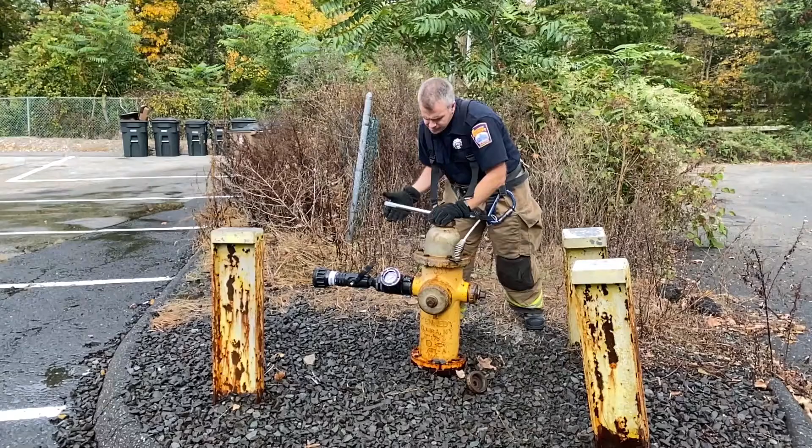Welcome to the 2021 Hydrant Inspection Program for the Stamford Fire Department. For the safety and protection of the residents, our department members, and the operational aspects of our profession, this year we will kick off with a more in-depth inspection for the first round. Every stem will be turned and every hydrant will flow water in a controlled manner.

Our goals and objectives will be: inspect hydrants for several common issues, gather and record this data, a pressure and flow test, and pump the hydrants as necessary. This will allow us to obtain comprehensive data that will be analyzed to perform necessary repairs and create a more reliable fire protection system.

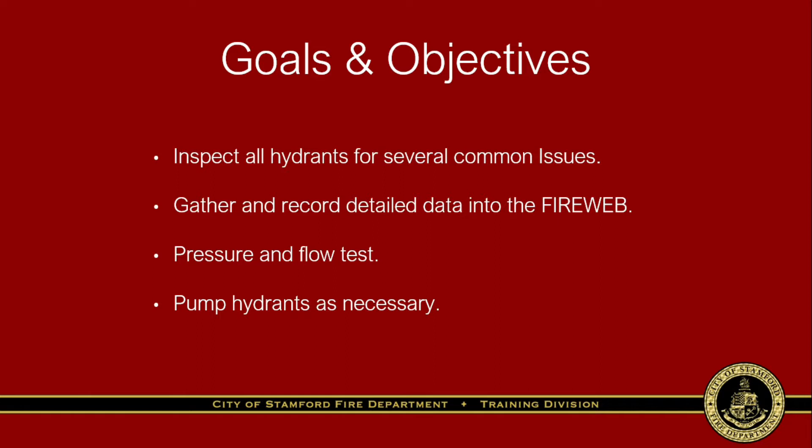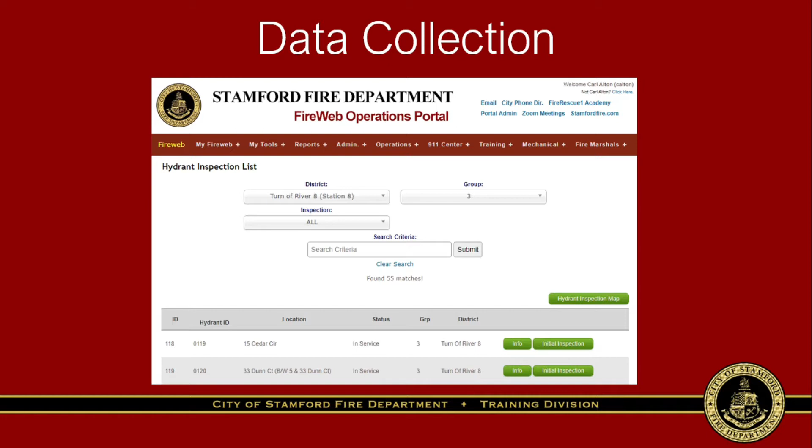The data collection point remains through the FireWeb. This is accessible while you are on your inspection routes. Simply log in, go to the Mechanical tab, and scroll down to Hydrant Inspections. Here, you can narrow your assigned hydrants by station and group. You will see new items and instructions on the inspection form, which will help us identify several issues we can have with hydrants.

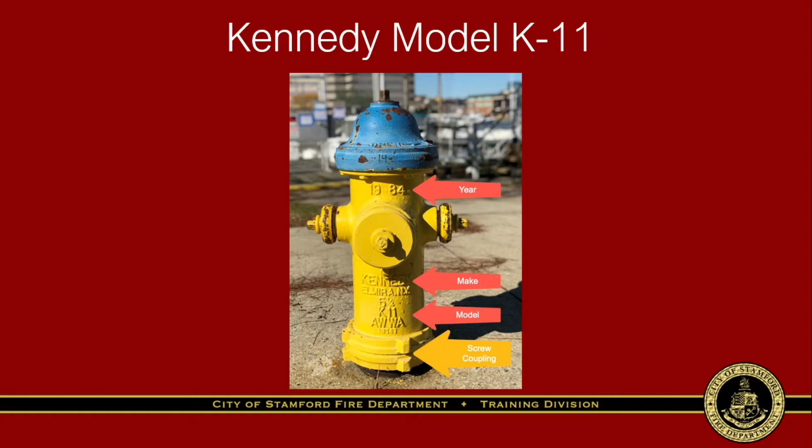Let's first review what type of hydrants we have out there. The Kennedy is one of our most common hydrants and comes in different models. This is a K11 and has a screw-type collar and will have detailed info on the make, model, and year. The newer Kennedy 81A has a breakaway collar that bolts the hydrant to the riser.

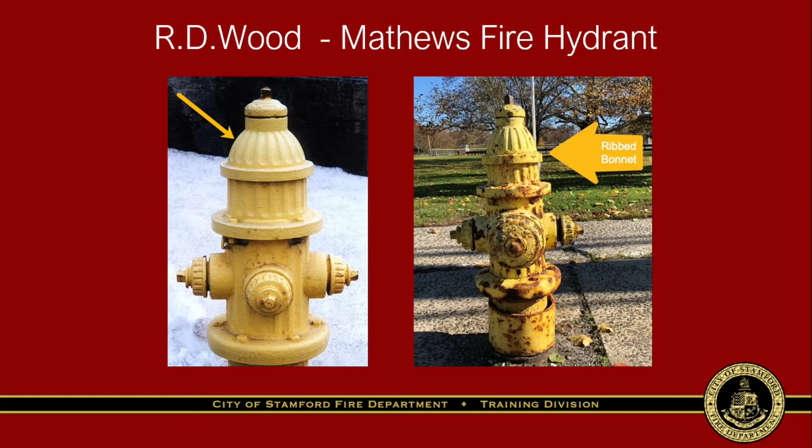We also have RD Wood or Matthews fire hydrants. These are easily identifiable by the ribbed bonnet. These are some of our oldest fire hydrants and info is limited on them. There are a few other hydrants that don't fit the pre-mentioned criteria. Some were also issued adapters to conform with our Stamford hydrant thread size. If there is any doubt on thread size, carefully test fit with your apparatus hydrant adapter and report any issues.

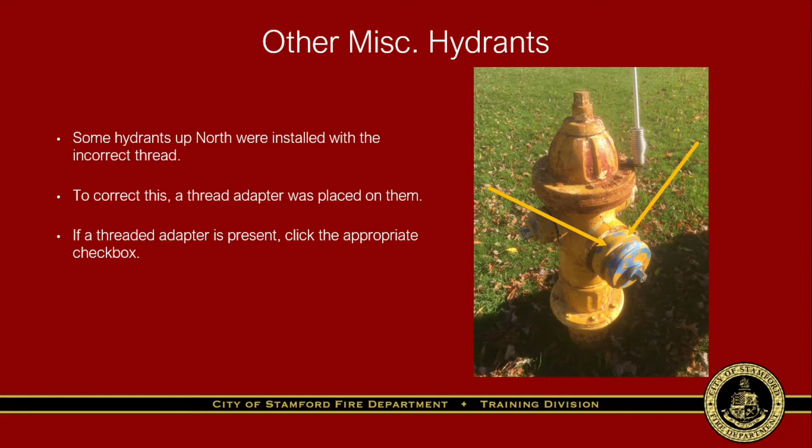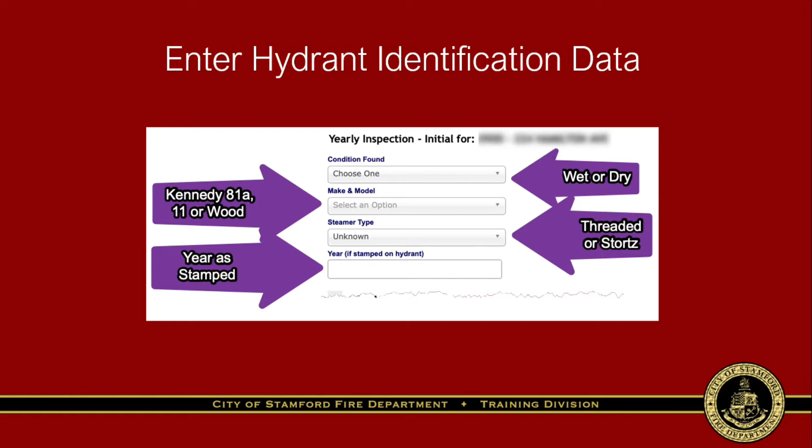To begin the inspection form, enter as much information as you can about the hydrant. The condition found will be defined after we perform a pressure test, which we will cover later. So what are we looking for? Some immediate concerns will be damaged hydrants, unstable hydrants, or collar damage to hydrants.

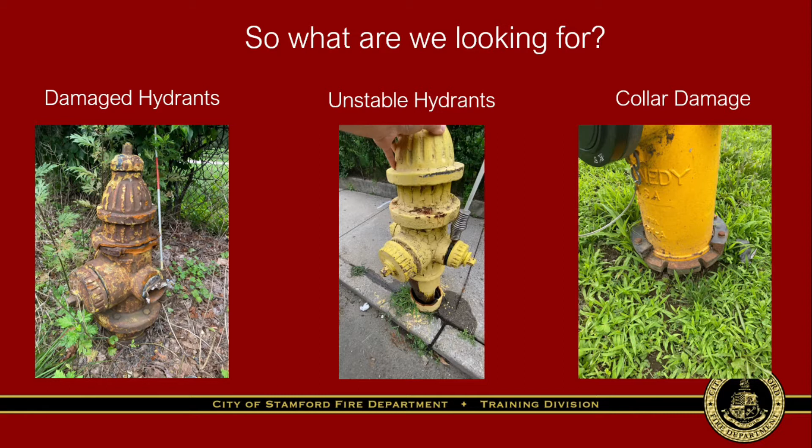These hydrants should not be turned on and immediately reported as out of service and a red ring placed on the hydrant. It is the policy of the Stamford Fire Department and the district unit's responsibility to place a red ring on the hydrant. If red rings are needed, they can be acquired at the mechanical shop.

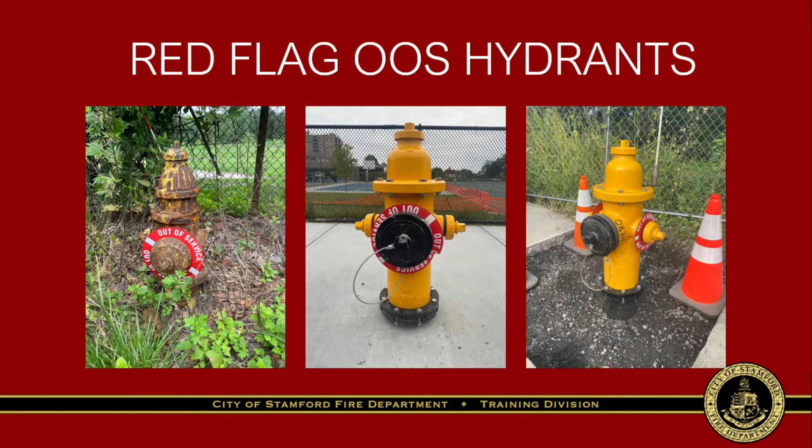Large rings will easily fit behind the large cap of a threaded steamer. For the Storz hydrant, you may need to slice the ring to fit it behind the Storz connection. We also have smaller rings for the 2.5 ears. Use one on each side if you have to go this route. Having more rings visible has already shown to help for everyday out-of-service knowledge or incident-specific emergencies. If you must identify a hydrant as out of service in this manner, please return with a red ring as soon as possible. In the heat of the moment, uniformity helps identify the issue clearly.

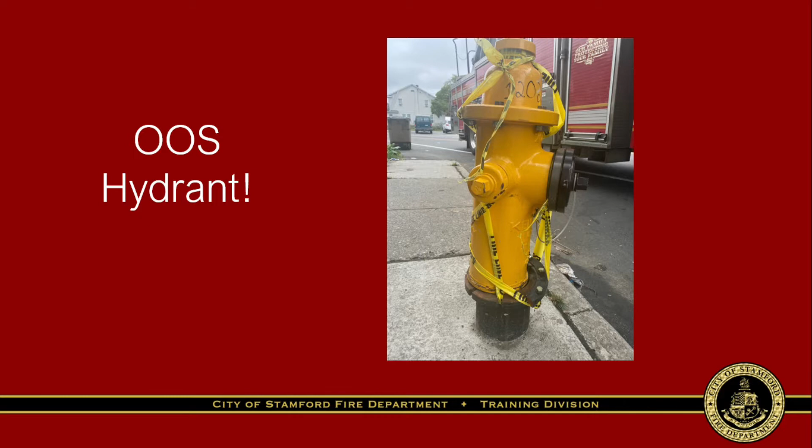To take a hydrant out of service, the officer in charge will change the status of the hydrant in the FireWeb portal by going back to the Mechanical tab to Citywide Hydrants. In the search criteria, enter the hydrant number and click Submit to go specifically to this hydrant. For that hydrant, click Add History. Scroll down the page to the Choose Category menu and choose Out of Service Hydrant Damage. Write in the notes the damaged issue and that the hydrant has been red ringed. Then click Save and return to the inspection platform.

This will generate the appropriate email notifications about the hydrant to the Deputy Chiefs, Fire Supervisor, and our Hydrant Division to begin the repair process. There is no need for phone notification.

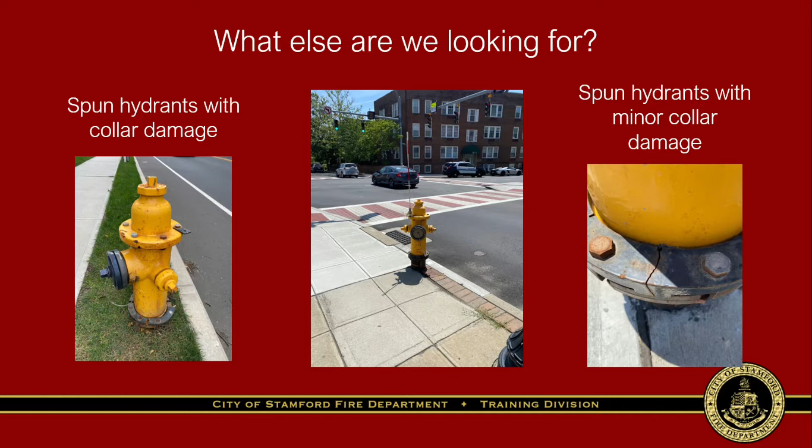Spun hydrants with significant collar damage shall be taken out of service immediately. Spun hydrants with minor damage can remain in service as long as all bolts are in place around the collar. However, a service needed report must be submitted. This process can also be accomplished through the same manner as taking the hydrant out of service. However, this time choose the option of service needed and enter the problem into the notes. Service needed reports can also be made for items such as this broken dust collar.

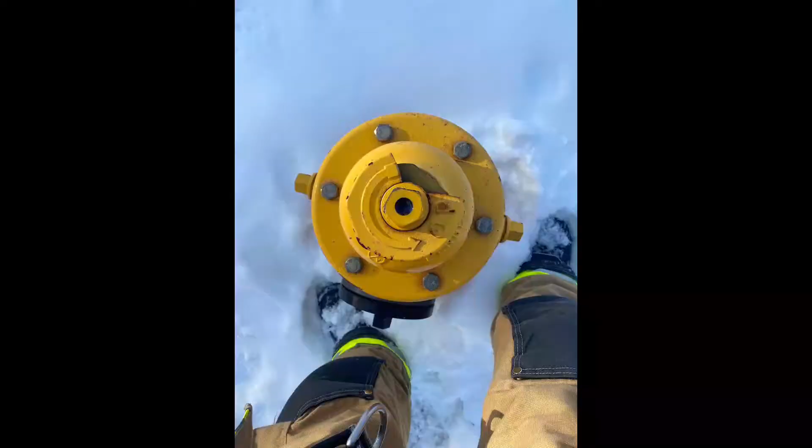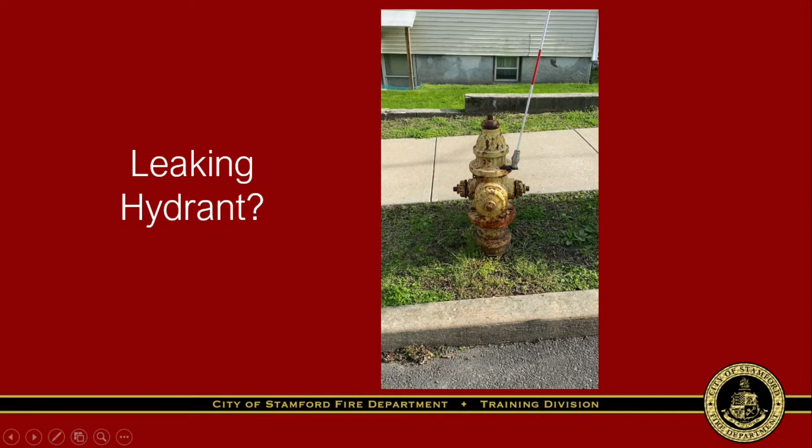Leaking hydrants can be checked first to see if they are completely shut off. If it appears they will not stop leaking, no further inspection is needed. A red ring shall be placed on the hydrant and the officer shall place it out of service in the hydrant app. Aquarion will have to respond out and turn off the hydrant at the street valve key.

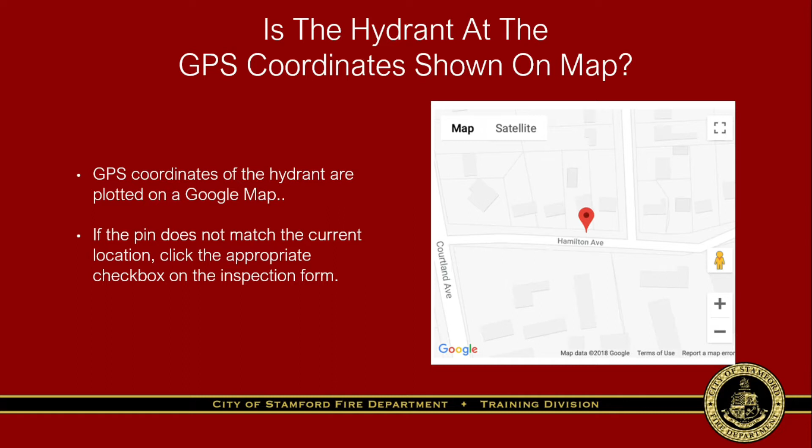GPS coordinates. This helps us all know exactly where the fire hydrant is when responding to incidents. If it appears the pin does not match the location of the hydrant, check the appropriate box on the inspection form. We will go out and update these coordinates so CAD, the MDT, and Tablet Command can show their proper location. Is a gate valve visible? Many have been paved over through the years, and this will help us expedite repairs.

Is there a flag installed? Some companies are equipped with tools to fix or install a new flag. If you are able to install a flag correctly, please do. If not, check the appropriate box.

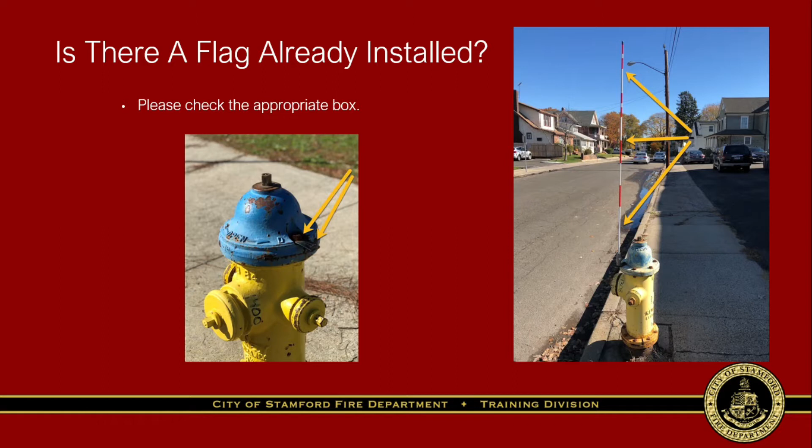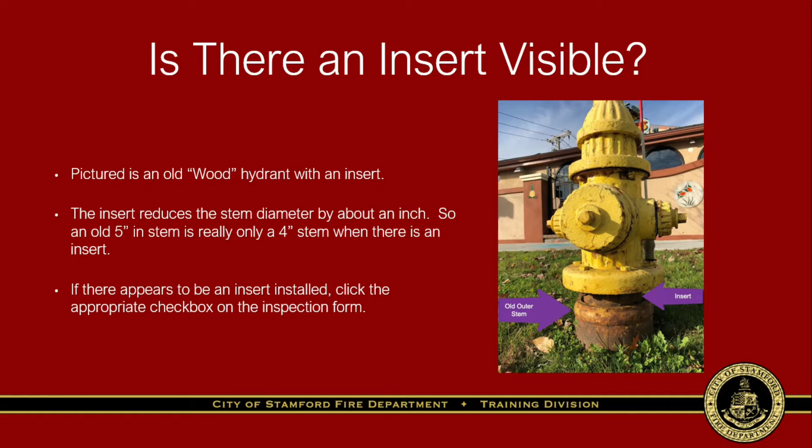In the past, hydrants that were damaged were fixed using inserts. A smaller barrel is inserted into the existing barrel. This results in less water. It is now our policy not to use inserts anymore. However, we would like to know how many Kennedy inserts are out there. A Kennedy insert may or may not clearly look like an insert at the base. However, it is obviously narrower than a standard Kennedy and will be stamped on the back with a 4.5.

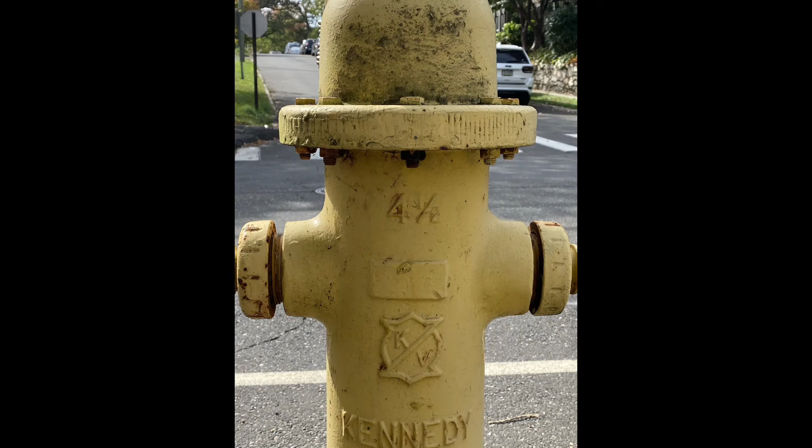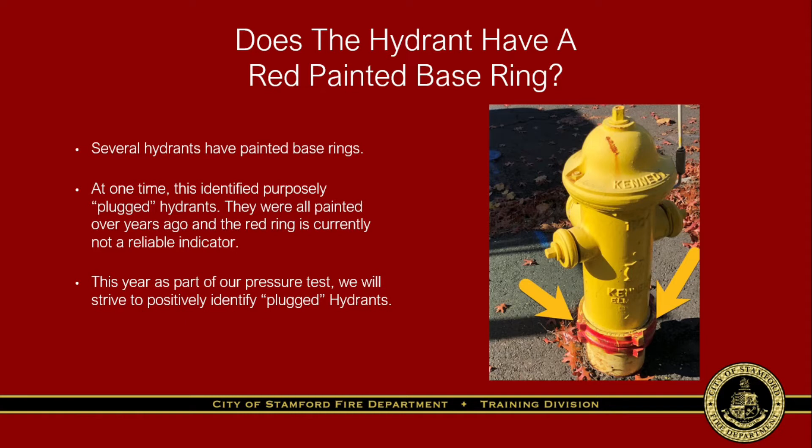Please mark appropriately. Check the base ring to see if the hydrant is or ever was painted red. Some hydrants located in high groundwater areas were purposely plugged and the rings were painted red to indicate that the hydrant must be pumped after each and every use. Unfortunately, over time, this system is no longer accurate because red rings were painted over or repainted red incorrectly. This year we will attempt to positively identify our plugged hydrants during our pressure test and mark them correctly. We will also review how to identify a plugged hydrant versus a wet hydrant shortly.

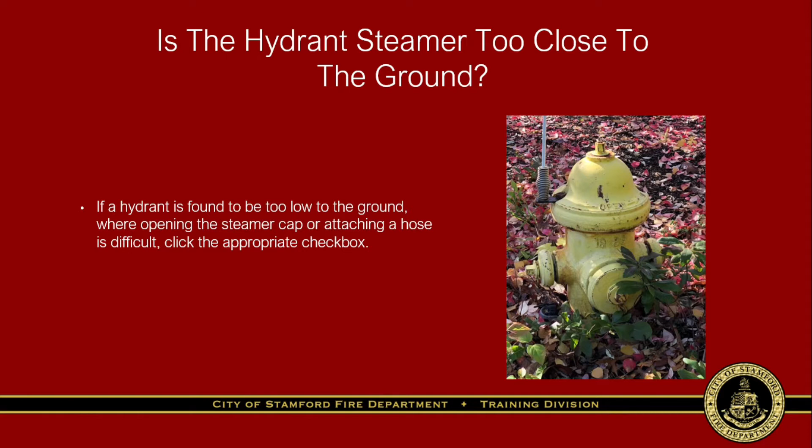If a hydrant is found to be too low to the ground, please check the appropriate box. Our goal is to add extension rings to these hydrants to make them more user-friendly. If you come across hydrants buried in brush or are hard to see from the road, please check the box and also email a picture to sfd.hydrants@stanfordct.gov so we can contact the appropriate party to be sure hydrants are not obstructed.

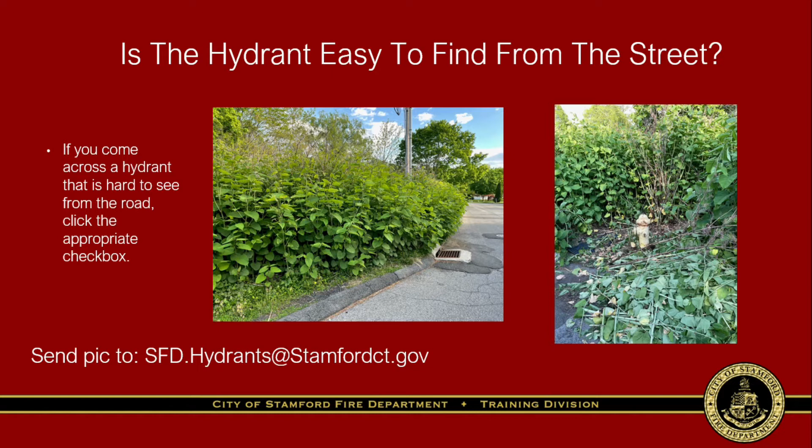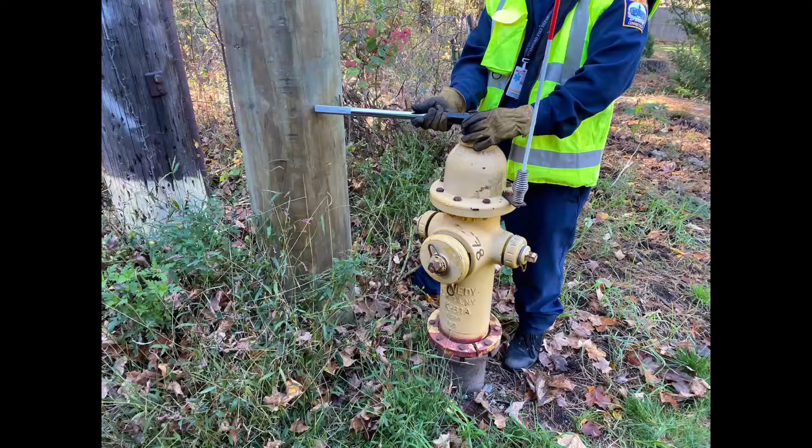Hydrants should have a minimum of a 3-foot radius around all sides of the hydrant and be clear of private property fences, walls, poles, or any other vertical obstructions that could inhibit the use of the hydrant. Please do what you can to continue the inspection and we will take the appropriate action.

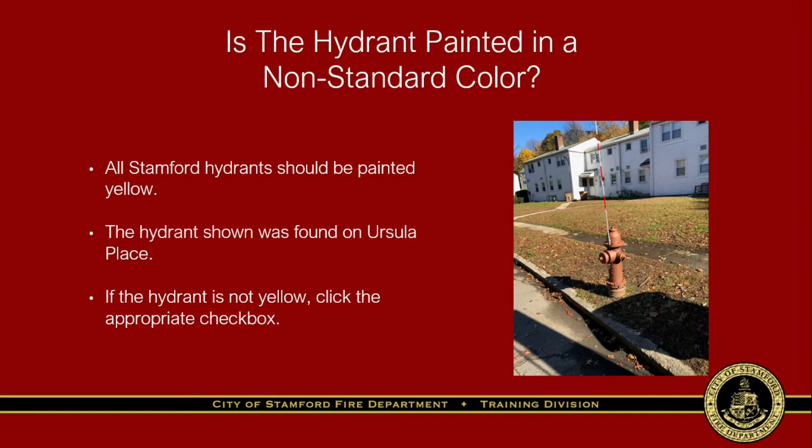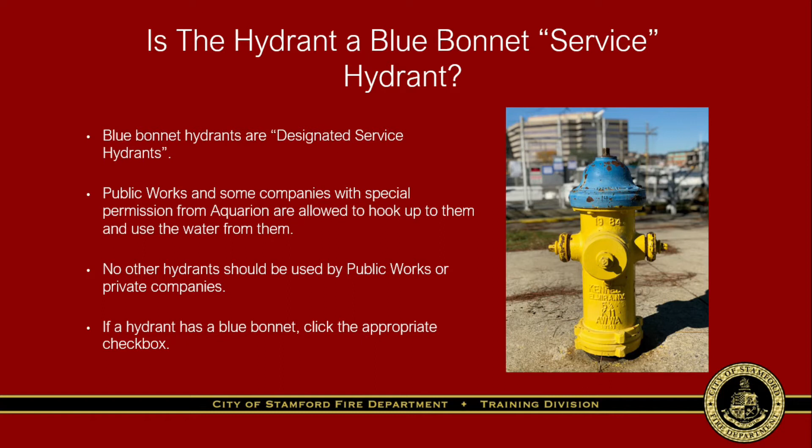If the hydrant is not painted in our standard yellow, is in need of a general paint job, or if the hydrant has a blue bonnet, check the appropriate box. We want to ensure only properly marked hydrants are used by approved agencies. For your information, you may come across blue rings on a hydrant. These hydrants are still in service, but Aquarion has placed a blue ring on it to notify potential unauthorized third-party users that this is for fire department use only. Continue with the hydrant inspection as normal.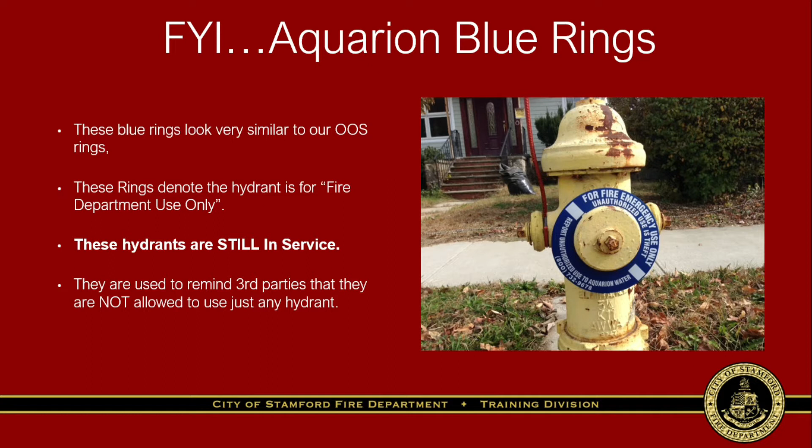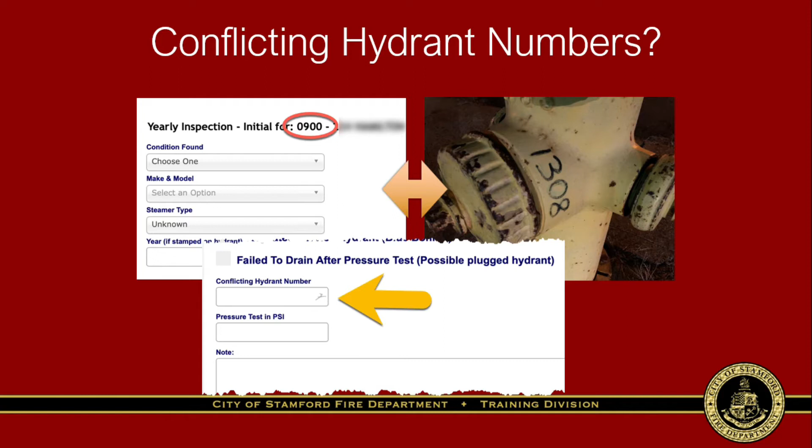Check the hydrant number written on the side of the hydrant. If there is a conflicting hydrant number, please enter that number on the hydrant form. All companies will be supplied with markers to clearly overwrite numbers to make them legible again. Keep numbers written on the side near the large steamer. We would like our city property to look as neat as possible.

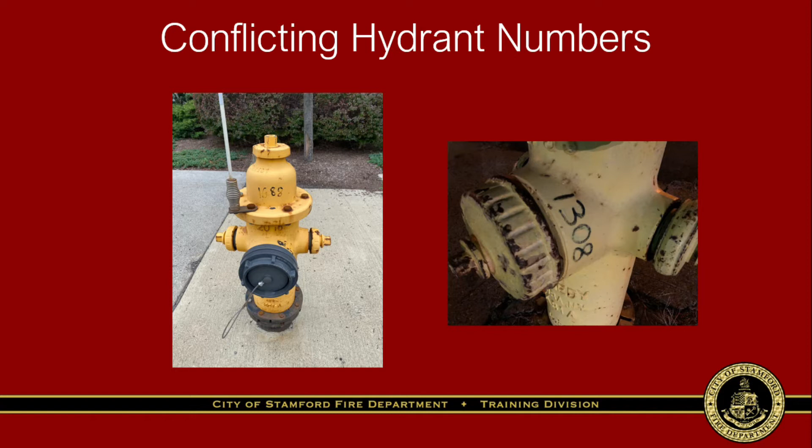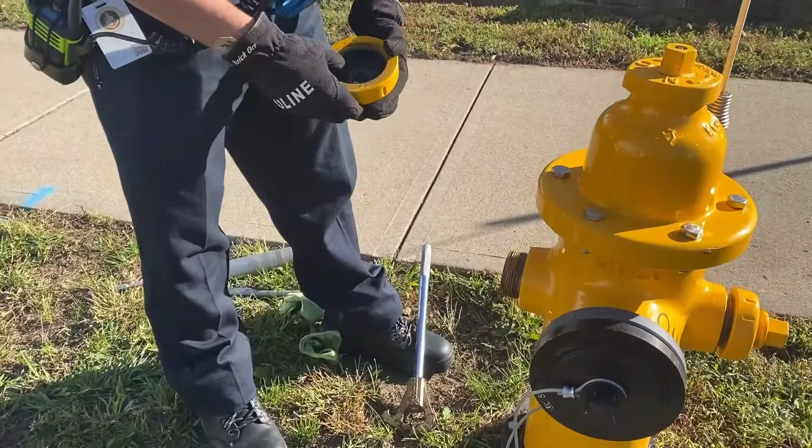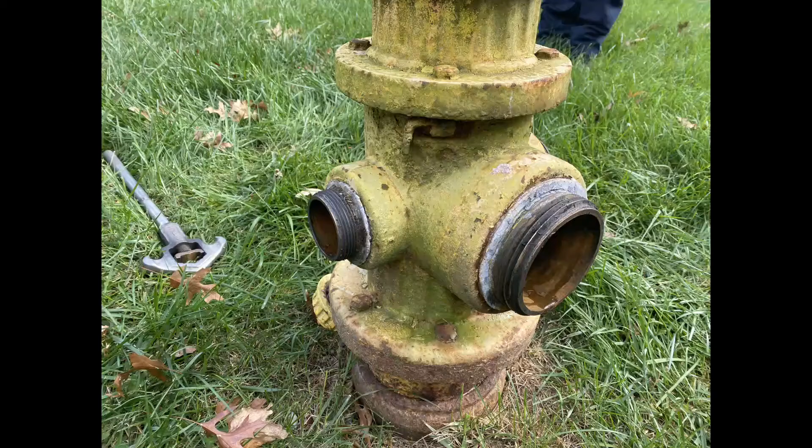Check the caps for gaskets and the condition of the threads. If the threads, also known as nozzles, appear damaged in any way, please report appropriately on how it will affect the safe use of the hydrant. Nozzles should be secure and not loose within the hydrant. We are trying to equip companies with grease. If you have grease, please apply as necessary and check the appropriate box for grease added or grease needed.

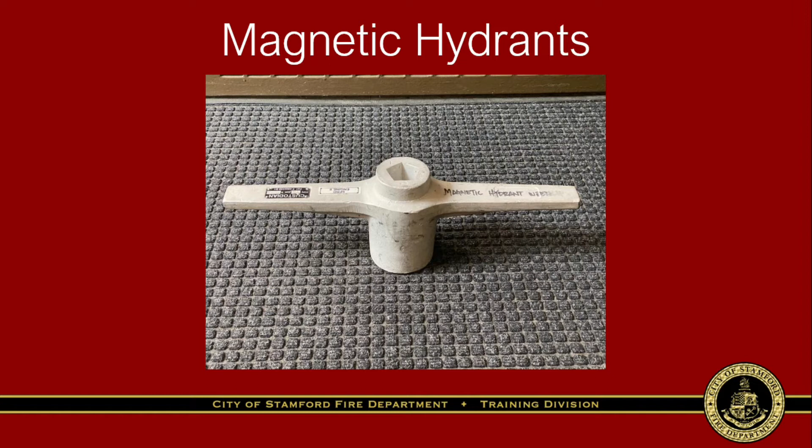The use for magnetic hydrant wrenches does not appear to be a concern as it was in the past. There should only be a small handful of these left in the city, and we are considering changing them out for regular operating nuts. Check the box if you find one.

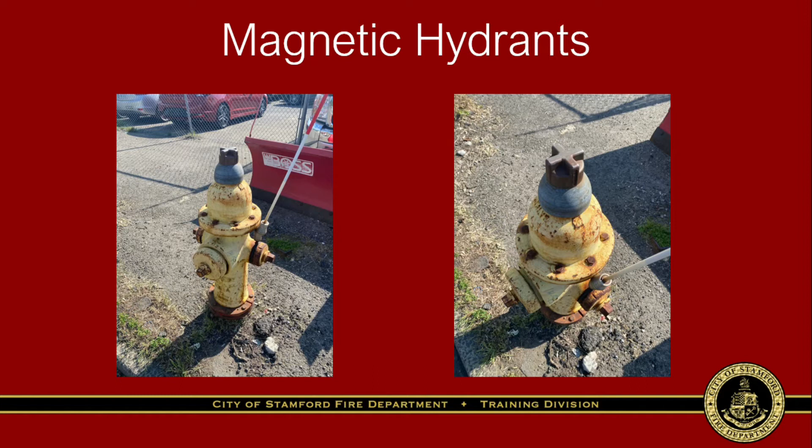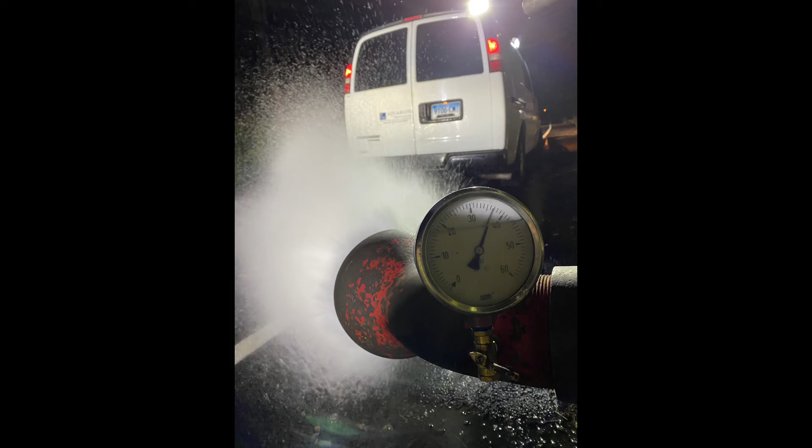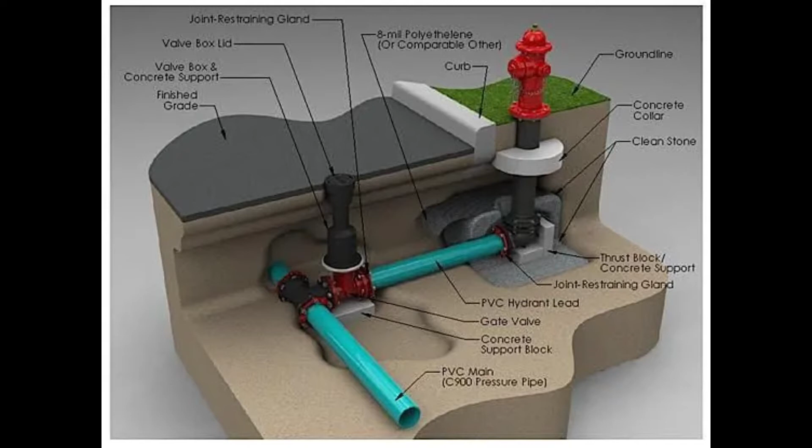Now to the stem and pressure testing we will be doing this year. We want to ensure every stem is in operation and every hydrant can flow an adequate amount of water. There are more in-depth ways to conduct flow tests on hydrants, and Aquarion does perform these tests around the city for more accurate GPM data. However, to protect personal property and gain a general idea of how the specific hydrant flows and operates, our test will help us determine if there are issues with the hydrant or valves below the surface.

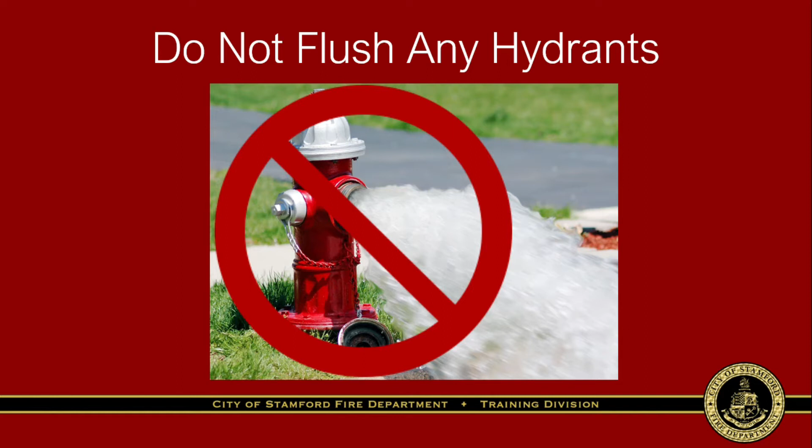Let's start by stating, for this inspection, we will not flush hydrants by operating the hydrant wide open. Aquarion is finishing up a citywide flush of the system. The flow tests we will be doing will consist of flowing water in a more controlled manner. However, we will perform a burp and soft flow test of the hydrant. The burp will discharge any sediment from the hydrant before we send it through our equipment. This will also give us a good indication of how our stem will operate.

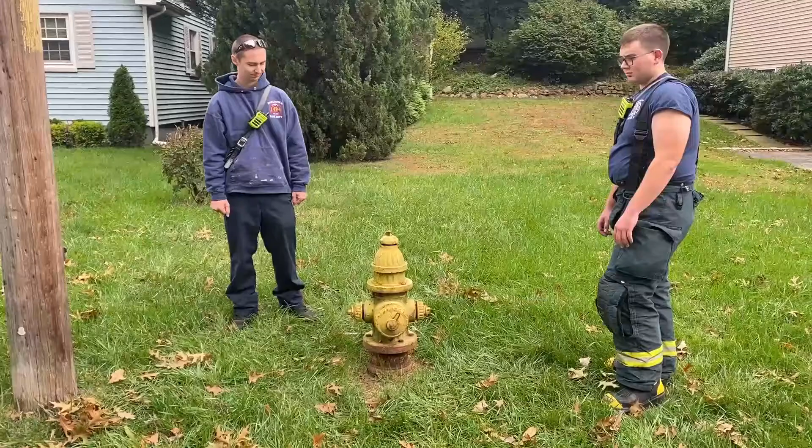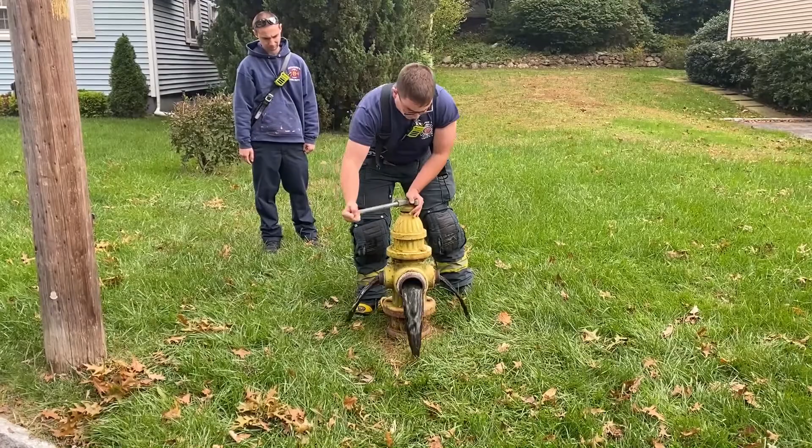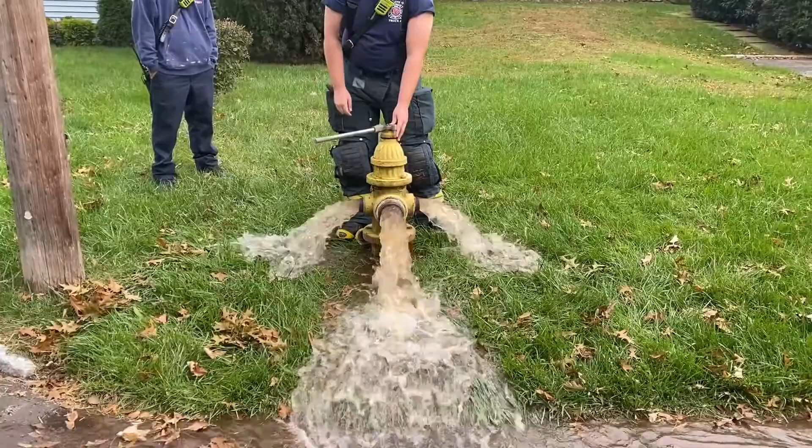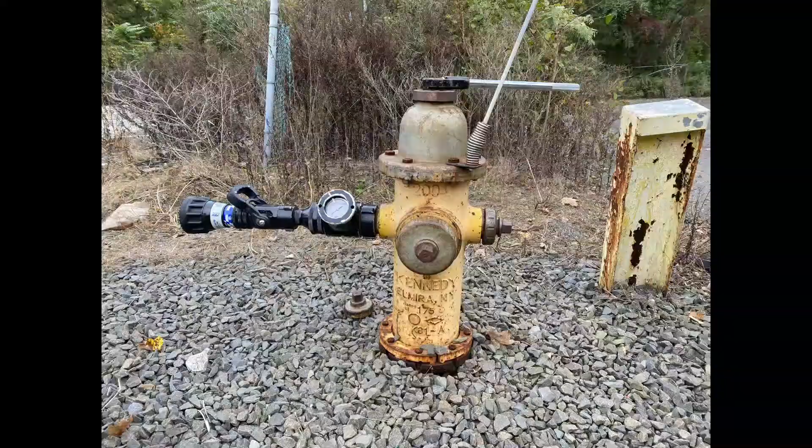What you will need for the pressure test is the high-rise pressure gauge, bell reducer, TFT 1.5" trash line nozzle, and a hydrant wrench. Please do not use any other nozzle than the TFT as we are taking calculations based on this specific nozzle.

When we open hydrants fully, it is important to open the hydrant very slowly until all the way open. One full turn with a little pause, then moving on to another turn, pause, etc. This will help prevent any pressure drops in the system that could set off nearby flow switches in buildings or activate Aquarion pump systems which may generate water hammers.

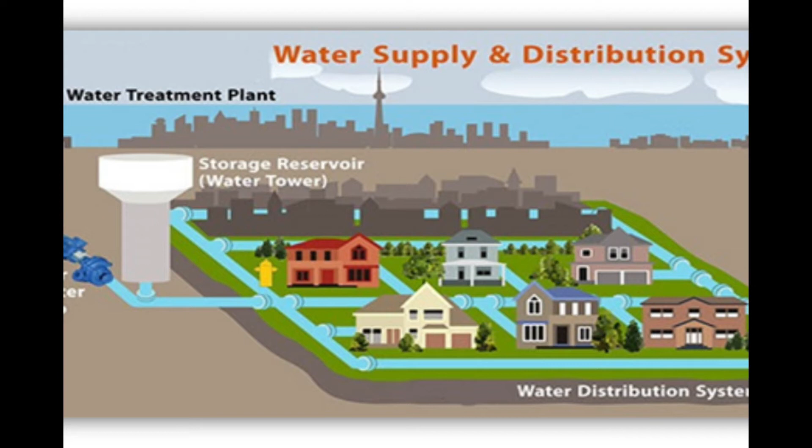To begin the flow test, set the equipment on the hydrant facing a direction that best suits to not cause any damage to our citizens' personal property. If you need to redirect water streams to protect property, please utilize options such as the elbow in the high-rise bag.

With the nozzle bail wide open and on fog, turn the hydrant on and observe the flow while also counting the number of turns. Once the hydrant is fully open, mark the number of turns it took to fully open on the inspection form. Take notice of the flow while opening the hydrant. If the nozzle pressure appears to fluctuate up and down while opening, this will indicate to us a valve seat issue on a compromised hydrant that we must attend to.

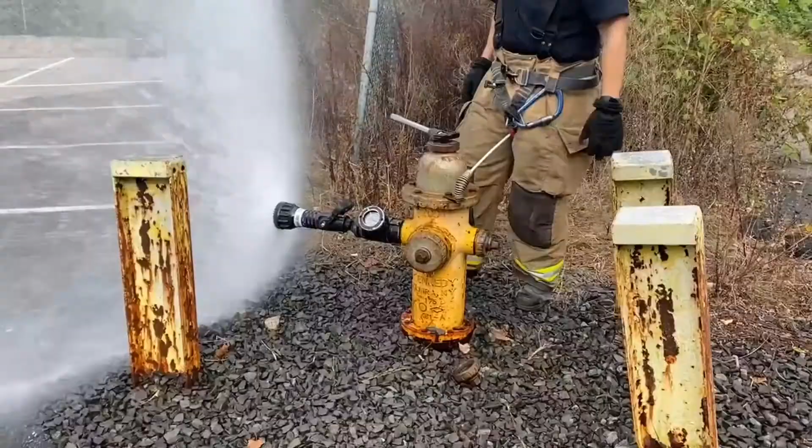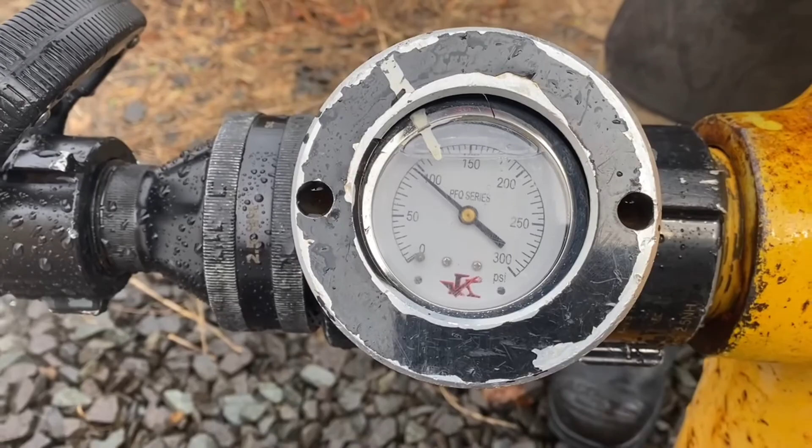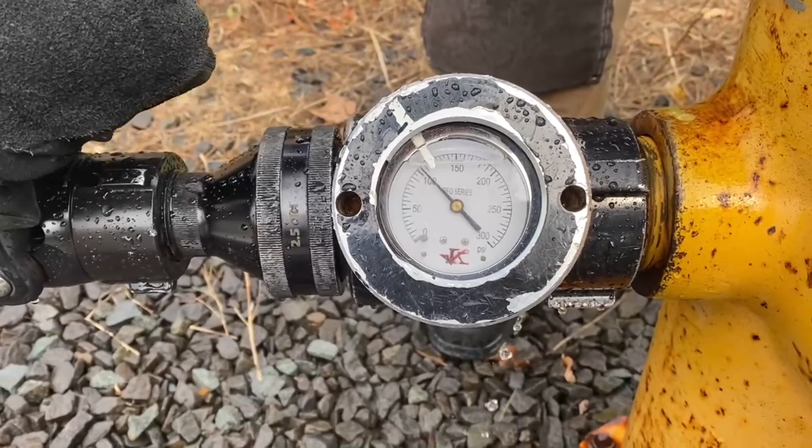When the hydrant becomes fully open, allow the pressure gauge to settle out to a reading. Check the reading on the gauge and mark this number on the inspection form as your residual pressure. Then, slowly close the bail on the nozzle, and when the gauge settles out again, you may now take a static pressure reading off the gauge. These numbers will allow us to make estimates on gallonage for this hydrant.

You will likely only see a small change from residual to static pressure. If there are huge drops in residual pressure, this will indicate to us potential flow-restricted issues underground that we must look further into.

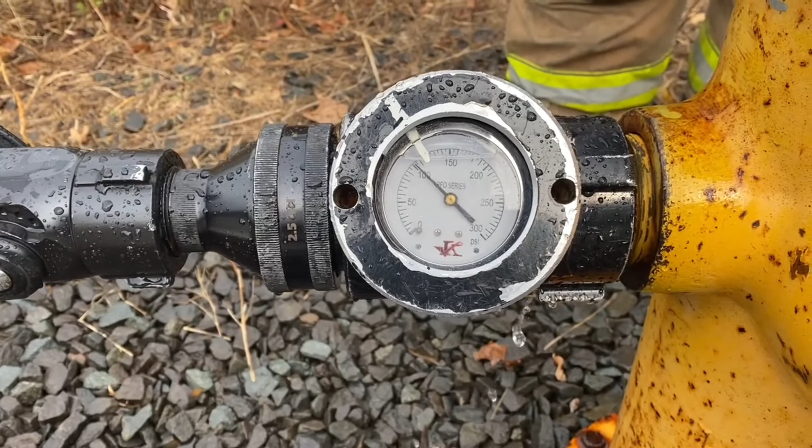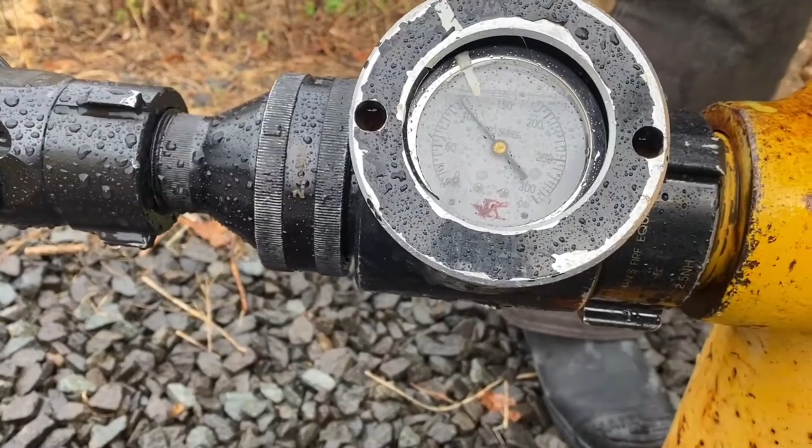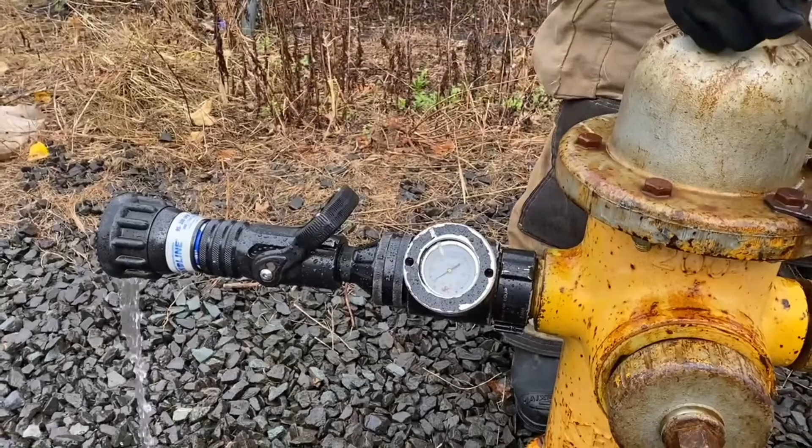Once the reading is obtained, we can now begin to shut down the hydrant. As you close the hydrant, you will see the pressure gauge fall to 0. This will indicate pressure is falling into the hydrant and the bottom drains are working. You can then reopen the bail on the nozzle and you may hear air rush into the hydrant. As you can see, the bottom drains are slow. Give the hydrant a couple minutes to settle out while you pack up your equipment and before we finalize the inspection.

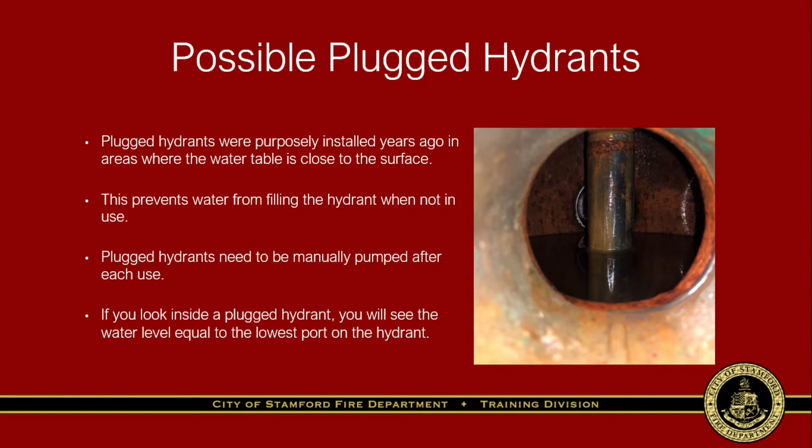We can first easily determine if we may be dealing with a potential plugged hydrant. The water level will remain standing and equal to the lowest port on the hydrant. Mark this situation appropriately as failed to drain after flow test and wet as condition found after flow test, and pump the hydrant dry. We need to continue with inspections 2 and 3 before confirming we have just a plugged hydrant.

If water is not visible after a couple of minutes, check for any remaining water in the barrel and pump out as necessary. As a reminder, do not throw weights into the barrel of the hydrant. This can cause the string to wrap around the stem, locking the nuts onto the stem. This will not only cause us to have to take the hydrant out of service, which you must report, it creates unnecessary cost and repairs. If it is left inside the barrel and the nuts bypass an intake screen on the fire pump, we can cause thousands in damage to fire apparatus.

Also, by lowering the string and nuts slowly until it hits the bottom, you can also gauge how much water remains in the barrel as you pull the string out. You can write your findings in the notes for the hydrant, which you will be able to see when you return on your next inspection.

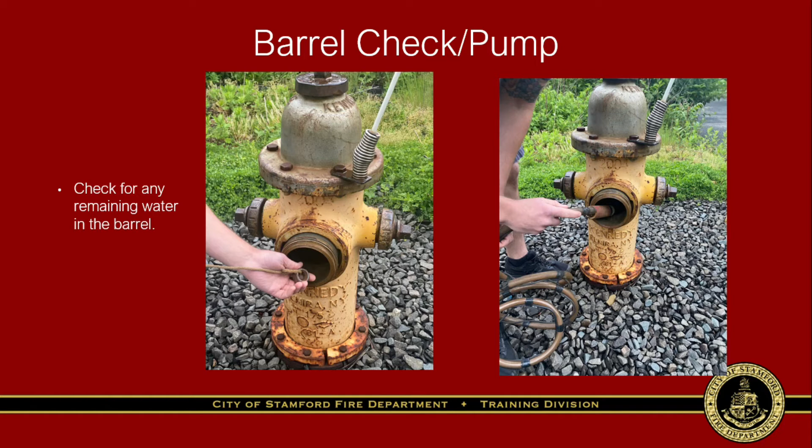At this point, if it appears there is still water lower in the barrel, record the hydrant as wet. Since some water did drain, failed to drain is not appropriate, as again that indicates a potential plugged hydrant. You must then pump the remaining water out using your hydrant pump. If the string is not wet or just shows some residual dampness, record the hydrant as dry on the inspection report. These differences between failed to drain, wet, or dry will help us diagnose which hydrants have valve leaking issues and which ones don't.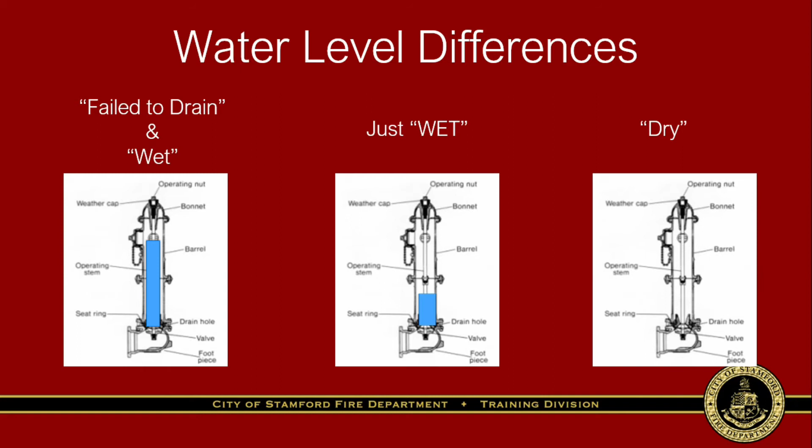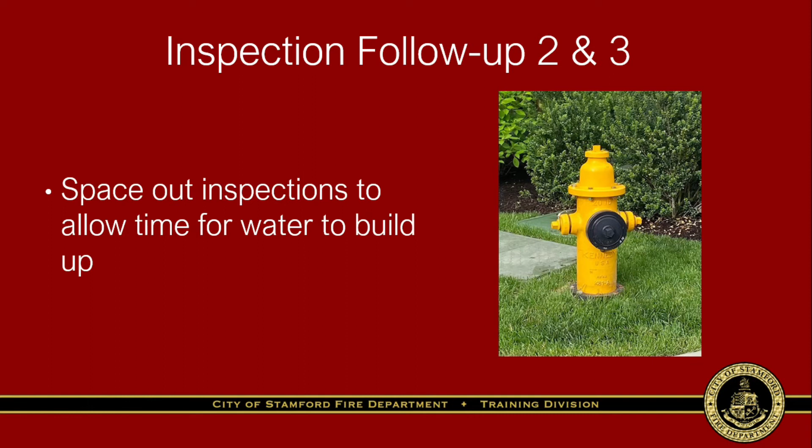You can now cap up the hydrant and close out your first inspection for the season. Inspection follow-ups 2 and 3 will only concentrate on those hydrants which were wet. To help us find leaking hydrants, please space out your inspections to allow time for slow leaking hydrants to fill the barrel some. This will help us accurately track them and make necessary repairs. If the water was still found after the third inspection, please be sure it gets marked as wet. We are exploring options to help prevent frozen hydrants this year.

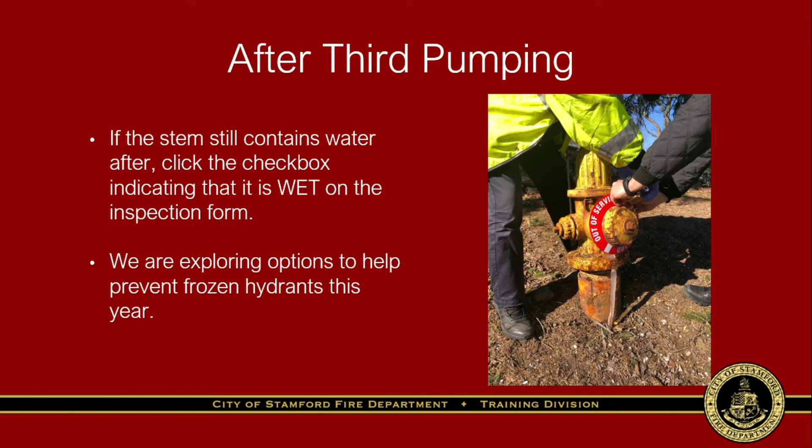This year's test will help us find potential unsatisfactory hydrants or problem areas within the city. This will allow us to work towards resolving these issues or pre-plan around them for better protection of life, property, and the safety of our crew members.